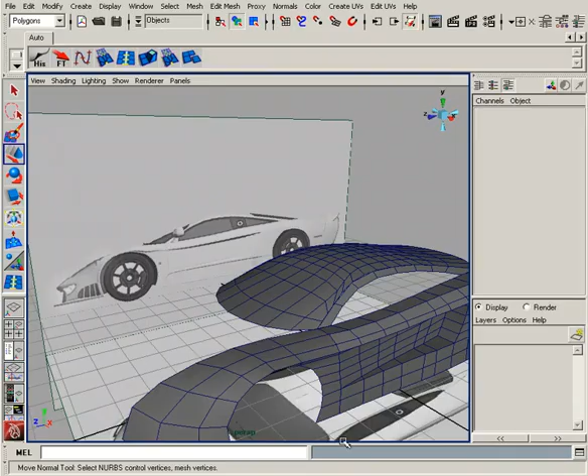If we take a look here, it's a little hard to see in this image, but try to look at what this scoop is doing. Basically, it's curved up here and kind of squared off in the back. What it's doing is you've got a tapered extrusion, much like the scoop, going from the back to the front, so it's deeper on the front.

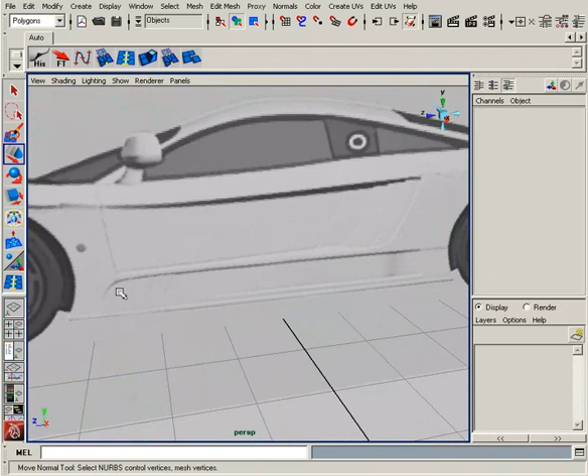Then you've got a portion above that's tapered in the opposite direction. So this is tapered from back to front, it's going in, and then a portion of that to the back is going in the other way, so it's recessed here. You get this neat little extrusion. It's a little complex, but it'll look really cool when we get done.

So let's go about the work of redrawing these edges. This is going to start to get a little tricky because we're going to have to start adding edges along this length, and that's going to affect things if you take a look here.

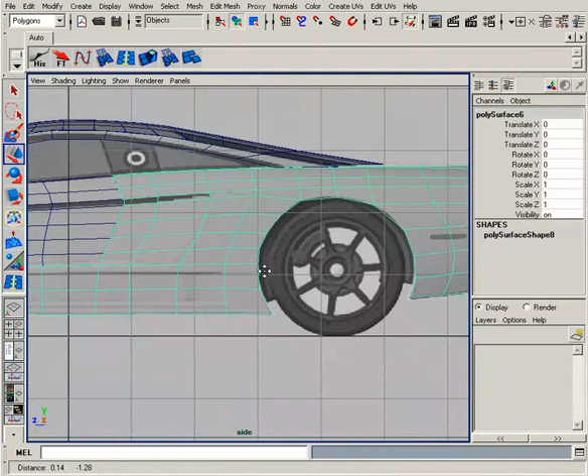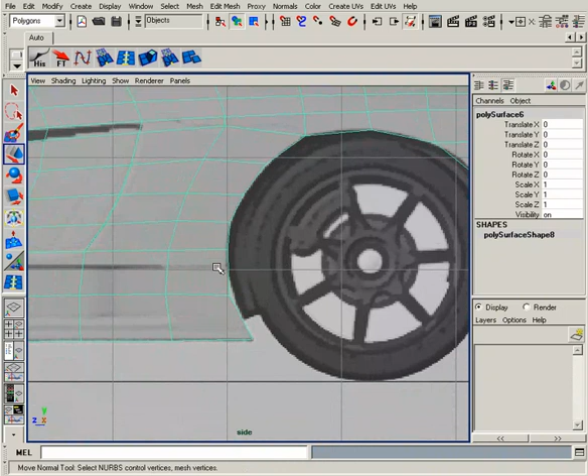You can see that these edges end up on our wheel arch, and the more edges we add, it's going to continue to square off these points, and that's not what we want. So you're going to have to keep watching this right here, and on this part, you're going to have to continually keep moving those points back to keep that circular shape. You'll see what I mean in just a second.

All right, so first let's go ahead and grab some points and try to start matching these up in a general way, because we don't have a lot of resolution there right now. So just get them kind of in the right spot.

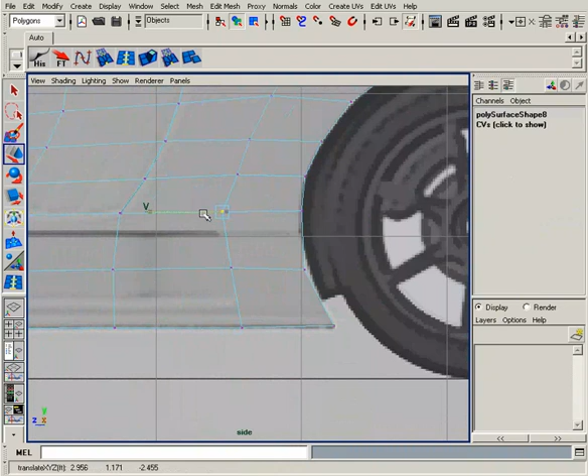Now what we need to do is add some resolution. We're going to add an edge right here, using our insert edge loop. Add it right along there. Now you can see that's added an edge loop right here on the square.

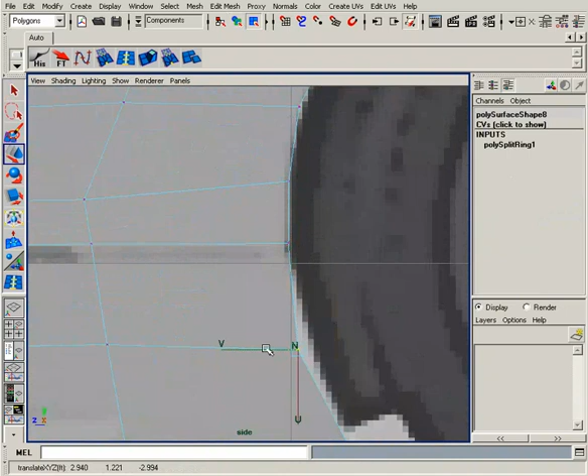So if we smooth this out, subdivide it, it's going to be kind of squared off right here. So what we need to do is, whenever we add an edge, go in here, spread these points out, and continually try to keep that circular shape. We have that image plane here to help us do that.

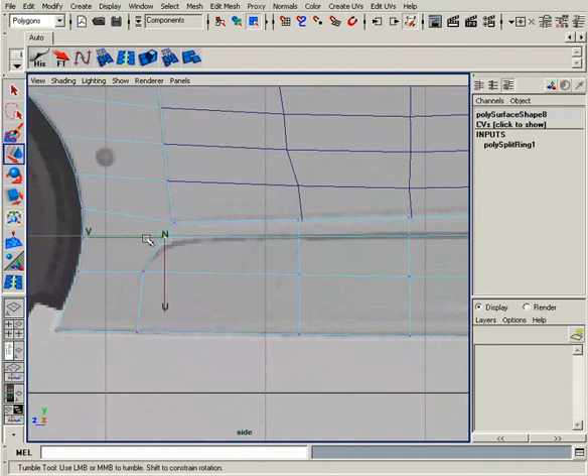So over here, it's the same deal. I'm going to just spread that out a little bit. There we go. And it looks like, well, we could see, but try to figure out how many edges we need to create this kind of curve shape. We'll tackle that in a second.

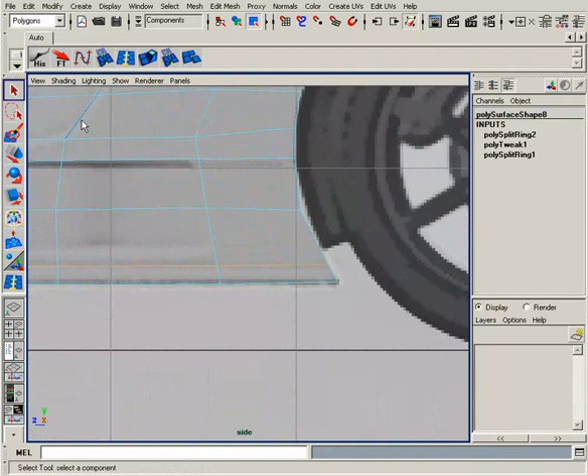One thing I know is that we do want part of this to stay out and not extrude. So we're going to actually add an edge loop all the way down here, and let's just grab these points and pull those in a little bit, just slightly. And let's see here, looks like that edge is squared off.

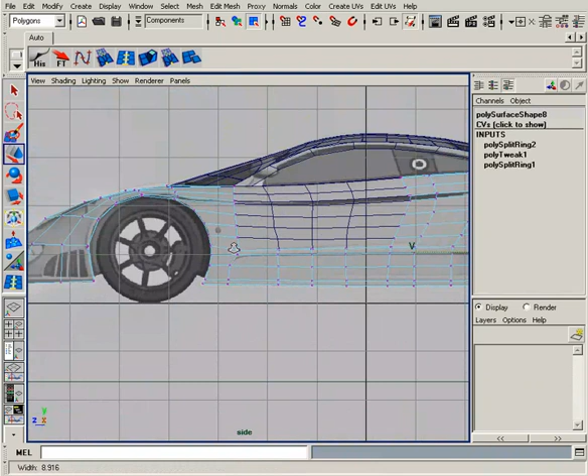Okay, so let's see, we might need one more edge right along here. So I'm going to go ahead and add that in just right here to maybe tighten that curve up a little bit. And I'm going to grab these faces, all the faces included here.

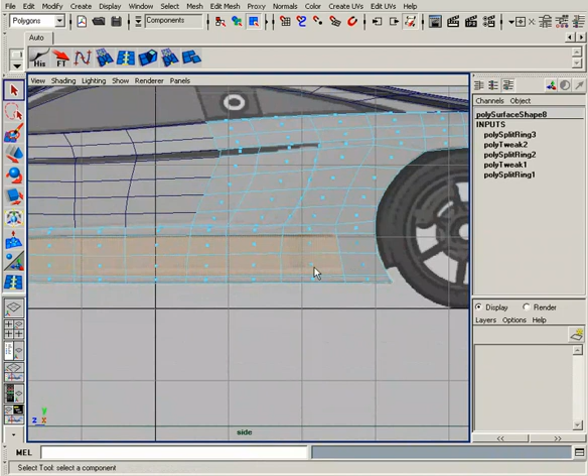Now if you can see right here, the portion that's going to be extruded back. So before we extrude that, let's go ahead and add that extra edge in there. You could do it afterwards, but we'll go ahead and do it right now. And again, we'll just tweak that little edge right there, a little vert.

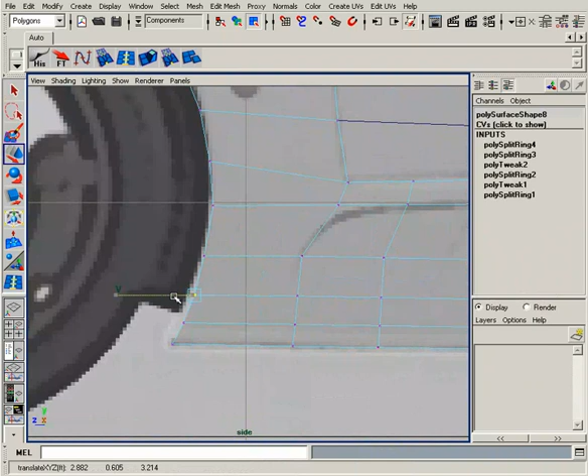Okay, now what we want to do is grab all these faces right here, all the way back.

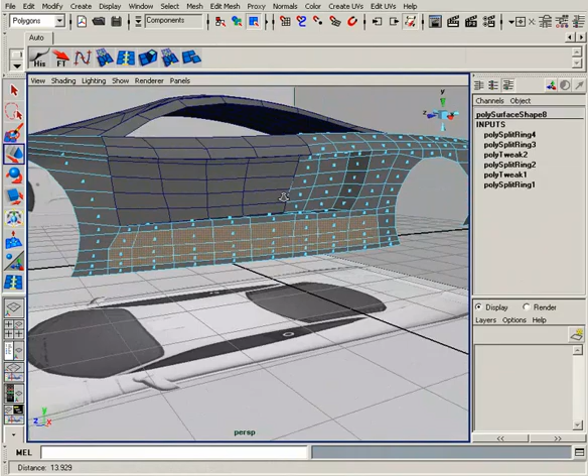All the way back to the end of our scoop there. And if we go in our perspective view, there we go. You can see what we've got selected here.

So now we want to do basically the opposite of what we did here. We want to extrude in and then rotate it so that this is a little more recessed, if that makes sense.

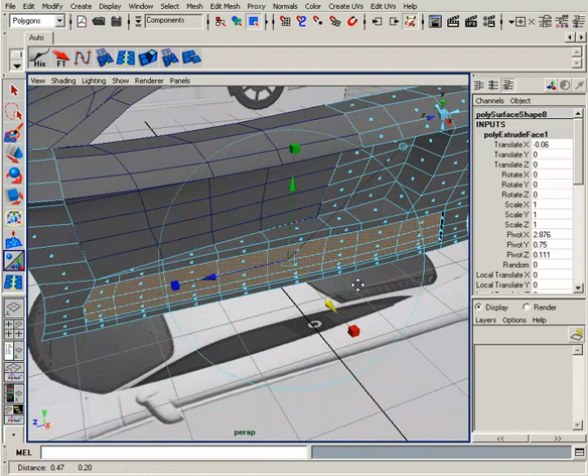So we go ahead and extrude. We go into world mode here. I'm going to just move it in slightly. This one we don't want to be so deep. I'm going to rotate that back.

Okay, let's check out and see where these points are ending up. That's actually pretty close.

If you get that error message when you go to try to move something, it could be that you still have your move by normals on. So you need to check that.

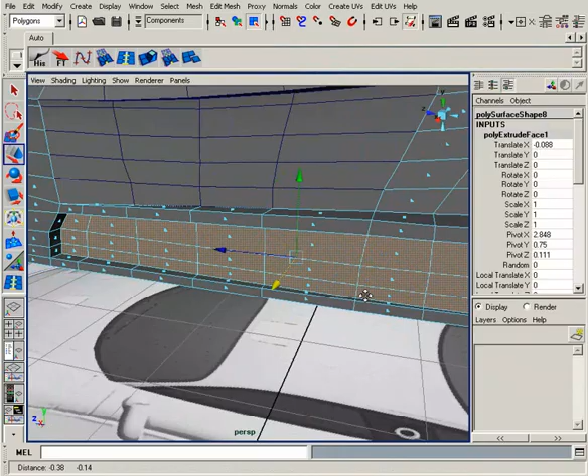All right, so we've got that extrusion taken care of. But now we need to do another extrusion.

So before we do that, I'd like to go ahead and close these up. They're pretty close, so I'm just going to go ahead and merge those together. And merge those. Okay.

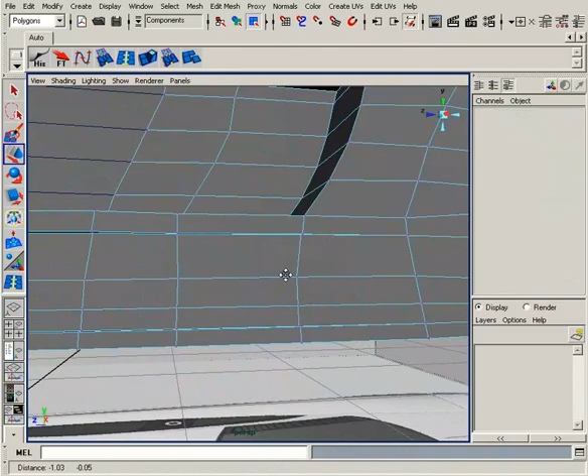So we've got that first portion extruded in. Now we need to worry about the second part, and that's the extrusion going the opposite way. We need to select the appropriate faces, basically selecting everything except that bottom row there.

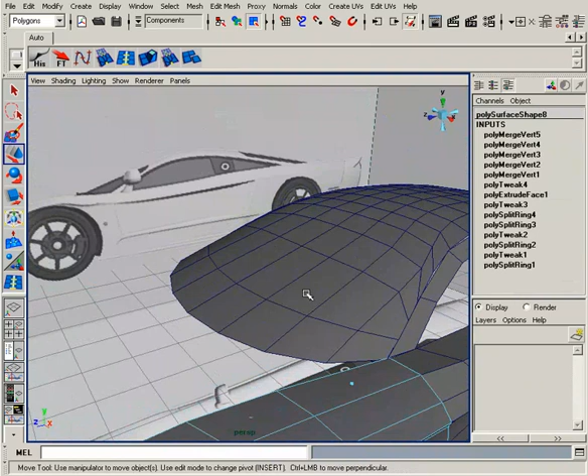Okay, actually let's take a look at this. I don't think it starts all the way at the front. I think it starts right up here. You can see where this edge starts. That's where we're going to start our extrusion.

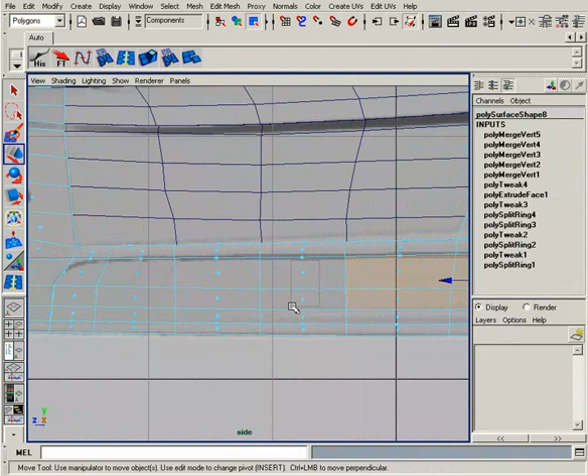So let's take a look at that in our side view, you can check that. It starts maybe right about here or so. We'll start maybe up one more.

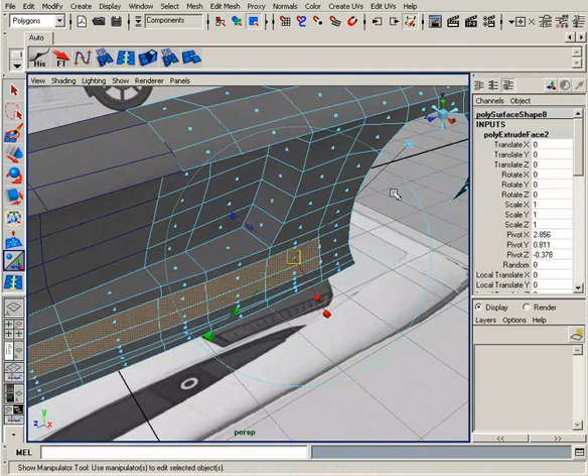Okay, and this we're going to do the same thing. We're just going to reverse our process here. I'm going to extrude that, extrude it in a bit, and this time I'm going to rotate it the other way, like so.

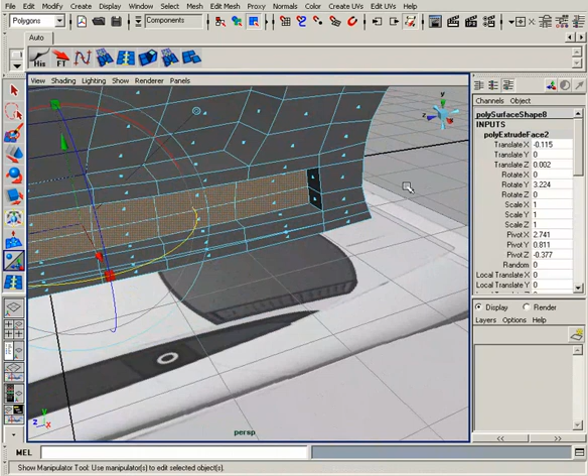Alright, and I'm going to grab these points. These are a little far off, so I'm going to go ahead and snap those in so my other points don't move.

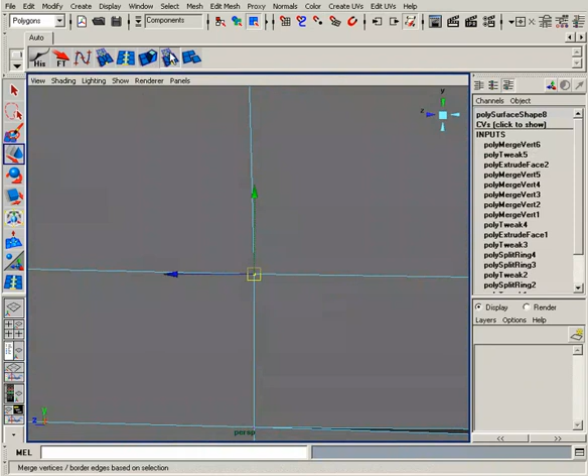And let's merge those together. Merge those together. Merge, merge.

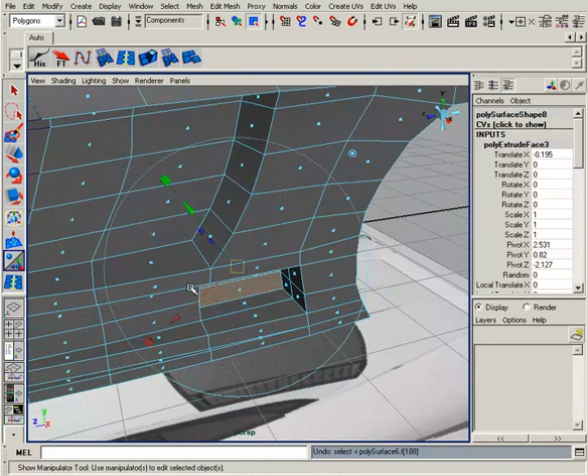All right, and the back part of this scoop actually extends in even more, so I'm just going to grab these two faces. I'll push them in a little bit, and I'll actually even extrude them in, I think. I'm going to do that. Extrude those in, and maybe send them back a little bit. And just smooth that out, just like that.

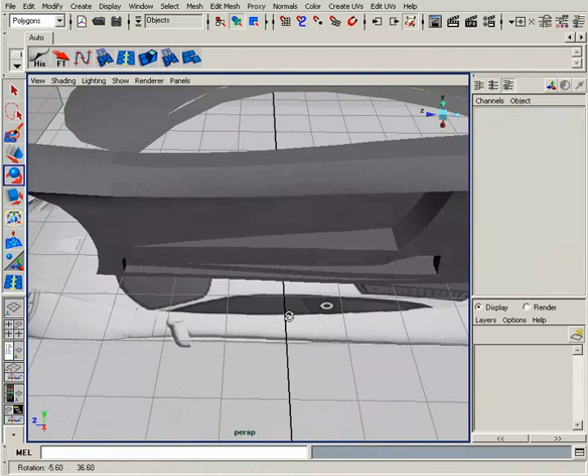Alright, so if we turn off our wireframe, we can see what we've done here. We've extruded this in, and then we've extruded that to make a more complex scoop here on the side of our car. Okay, so we've got that done.

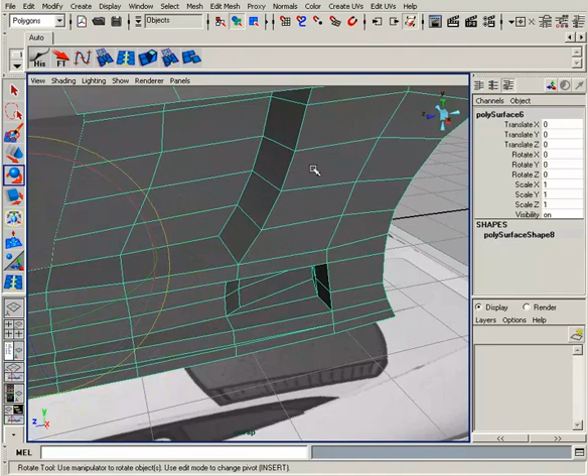So in the next lesson, we're going to come in and start adding edges along here so that we can sub-D this. Right now, if we sub-D'd it, it'd just be a big blob. So what we need to do is add some edges to hold these shapes, any of these sharp corners, and we'll come in and do that right in the next lesson.